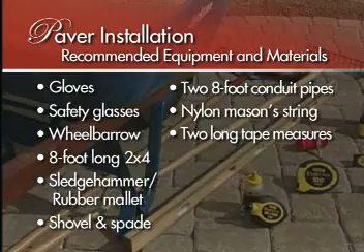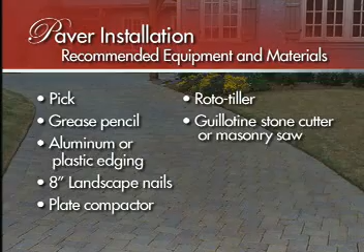string, 2 long tape measures, a broom, a carpenter's chalk line, a rake, a line level that you can clip to a string, a pick if your ground is hard, a grease pencil, aluminum or plastic edging, 8-inch landscape nails, a gas-powered plate compactor, a rototiller, a guillotine stone cutter or masonry saw, and wooden or metal stakes.

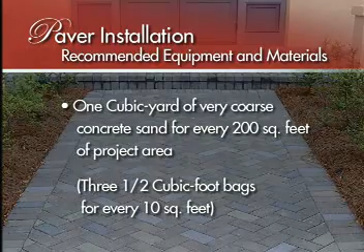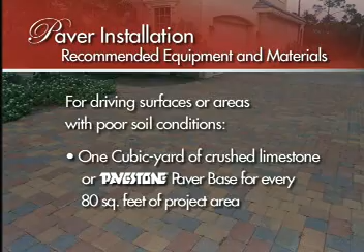A cubic yard of very coarse concrete sand for every 200 square feet of project area, or 3 half-cubic foot bags for every 10 square feet. If you're installing a surface that'll be driven over, such as a driveway, or you have poor soil conditions, you will need 1 cubic yard of crushed limestone or Pavestone paver base for every 80 square feet of project area. If you're installing a patio, pedestrian walkway, or any surface that won't be driven over, you will need 1 94-pound bag of Portland cement for each 30 square feet of the project area.

There are basically 8 steps to install paving stones. 1. Site preparation. 2. Excavating. 3. Installing the base. 4. Screeding the sand bed. 5. Laying the paving stones. 6. Cutting the paving stones. 7. Installing the edge restraints. And 8. Compacting and finishing.

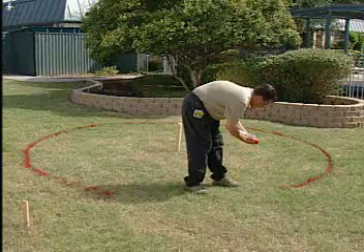This project is a freestanding circular patio. To begin building this project, you'll want to take a can of spray paint and draw to the best of your ability the perimeter of the project on the ground. We want to lay out the patio design and determine the finished height. Determine in what direction you want the pavers to lay in the finished project and run a string line across the middle of the project in that direction.

Then place another string line at a 90-degree angle, again passing through the larger part of the project, forming a cross. From the intersection of the 2 string lines, make a mark 3 feet out from the intersection on the width line. On the length line, make a mark 4 feet from the intersection. Now, measure the distance diagonally from the 3 and 4 foot marks. For the angle at the corner to be 90 degrees, the diagonal must be exactly 5 feet long. If not, adjust the angle of the width line until the diagonal is 5 feet.

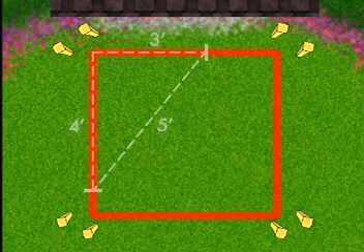If your project is a rectangular patio, begin by spray painting a rectangle on the ground to approximate the project's finished dimensions. Place stakes in each of the 4 corners. For accurate stone laying, it's very important that the sides of the rectangle are parallel and that each corner is a 90-degree right angle. You can make accurate 90-degree angles using the 3-4-5 triangle method as we just described. However, you want to measure the angle from a corner of the project, staking the string line out in 2 directions. For more detail on rectangular patios, see the installation information on the Pavestone CD. Now, let's get back to our circular patio.

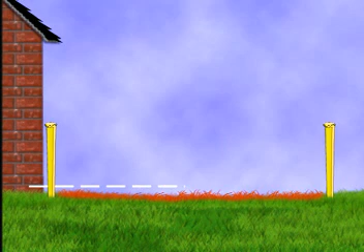With the project area staked and marked, the next step is to establish the height of the paving stones. The height should be slightly above the surrounding ground and sloped so rainwater will drain away from the house. To establish an adequate slope, use the line level. Start at a stake and begin by tying a string at the level you want the paving stone height to be. Set the level of the string by using the line level on the string line. Adjust the string on the outer stake

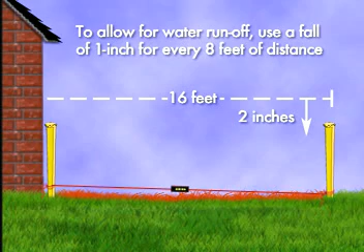until it is level. Now, to establish a slope, simply calculate a fall of 1 inch for every 8 feet. A patio that runs 16 feet out from the side of the house will have a slope of 2 inches. So just lower the string level on the outer stake 2 inches. Repeat with the other string line going away from the house.

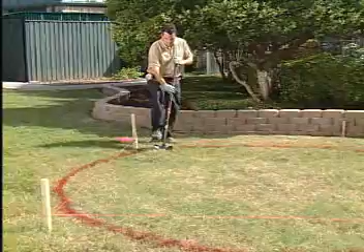With the project area marked out, you are now ready to excavate. Dig out the project area to the proper depth plus another 6 inches past the string lines. For a patio, dig out a depth of 3.5 inches down from the height of the string lines.

If the surface you are excavating is grass, use a spade or a sod cutter to remove the sod, but don't throw it away because you'll want to use it to re-sod the edge around the paving stones when the job is complete. So just roll it up and store it in a cool, damp place to keep it moist.

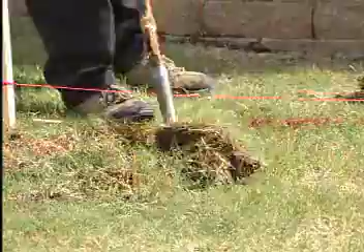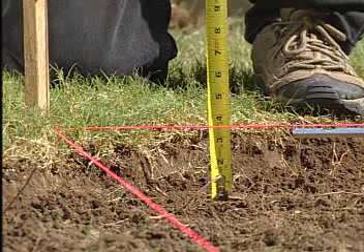Use a shovel to remove the rest of the soil once the sod is removed. You may have to use a pick to loosen the dirt if the ground is hard. Check your depth regularly using a measuring tape against the string lines and additional cross lines. You want to dig out a rough depth that comes to within 1 inch of the final depth.

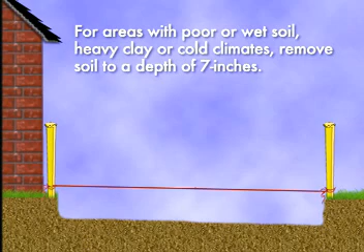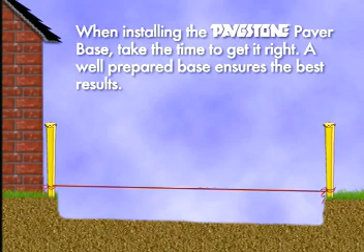For areas with poor or wet soil conditions, heavy clay, or extremely cold climates, remove the native soil to a depth of 7 inches. Now you're ready to install the Pavestone paver base. Be sure to take your time to get it right. A well-prepared base is the secret to a beautiful and long-lasting patio. Please do not skip this step and lay pavers over native soil.

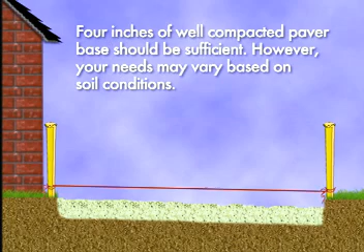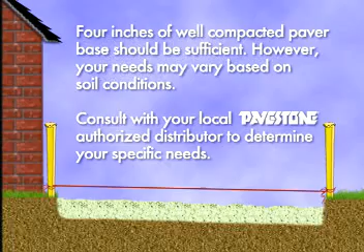Generally, 4 inches of a well-compacted paver base should be all you need. However, keep in mind that soils vary from region to region. Consult with your local Pavestone authorized distributor to determine the best type of base material for where you live. We will use the cement stabilization method today, which involves tilling Portland cement into the existing soil.

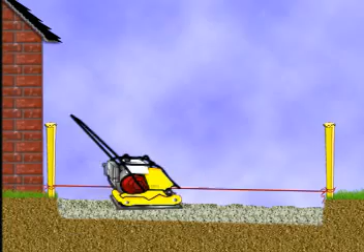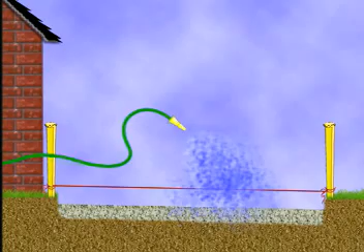After the soil and Portland cement are tilled together, use a vibrating plate compactor to tamp down the base. If the project area is small, you could use a hand tamp. However, we strongly recommend renting a plate compactor because you will also want to pack down the paving stones once they have been placed. When the base is compacted, lightly wet it so that it becomes rigid. Make sure that the compacting is complete.

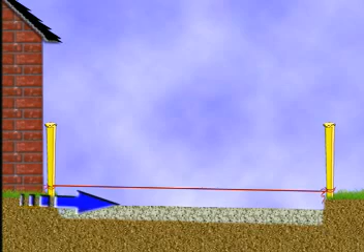The final step in preparing the base is to make absolutely sure that it is flat and that the slope is consistent. Your finished paving stone surface will conform to the base exactly, exposing every dip and rise, so it's important to get it level.

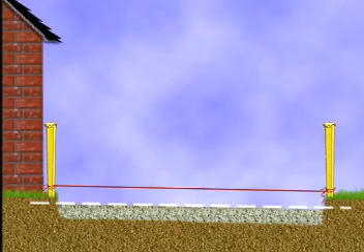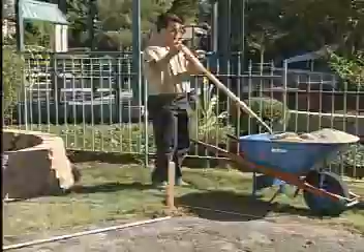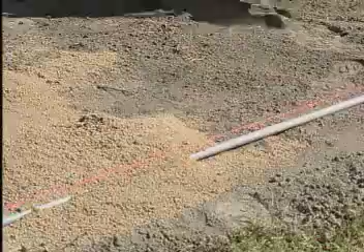Before you can set the paving stones, you must cover the base with an even layer of paver sand. Take two 1-inch or 3/4 inch steel conduit pipes and set them on the base about 6 feet apart, making sure that they are parallel to each other. Shovel some coarse paver sand between the pipes. Level out the sand by screeding it back and forth with an 8-foot 2x4 until it is smooth and flat.

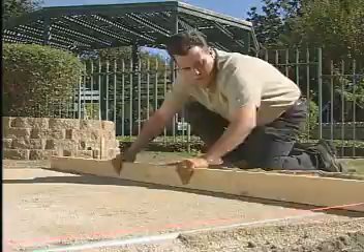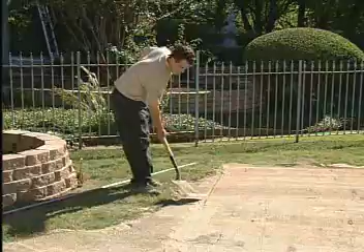Lift out the pipes and carefully fill in and screed the gaps. You will work the project area one square section at a time, first screeding the sand bed, and then laying the stones on it before moving on to the next section. Be careful not to walk on or make any impressions on the screeded sand as you work.

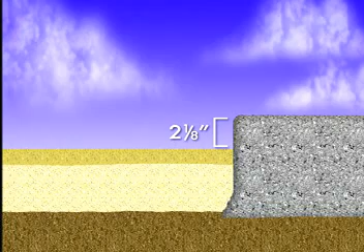Before we move on, a couple of things. If you are laying paving stones next to an existing concrete surface, you should lay the sand so that it is exactly 2 1/8 inches below that concrete surface. A good way to do this is to cut a 2 1/8 inch notch out of your 2x4 so that when you screed next to the concrete surface, the 2x4 will screed the sand 2 1/8 inches from the top of the concrete.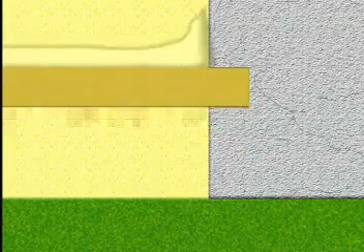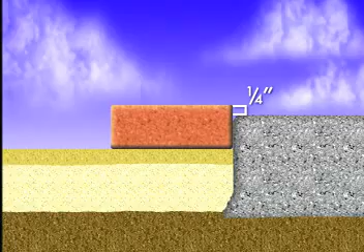You can check the sand height as you go by setting a paving stone next to the concrete. It should stand 1/4 of an inch above the concrete surface, because when it is compacted, the paving stone will drop exactly 1/4 inch on the 1-inch bed of coarse sand you just screeded.

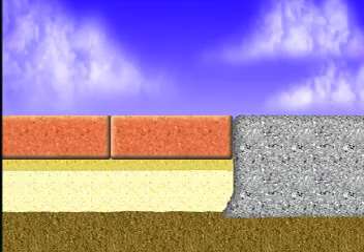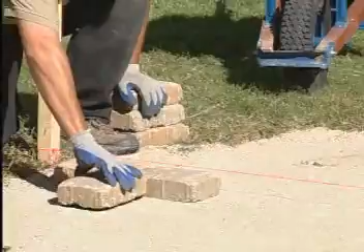For a square or rectangular project, start laying your paving stones in the sand, first starting in your square corner and working your way outward into the project area in a triangular direction. Make sure to lay your border stones first. Since our rounded project is freestanding and not up against your house or a sidewalk, we will lay out in a triangular direction from a starting point at one edge of our project.

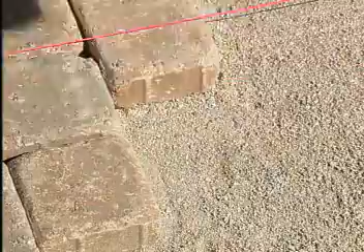Lay your stones one by one, sliding each new paving stone straight down onto the sand against the paving stone you have just laid. Be careful not to slide the paving stones across the sand into place, or you will ruin the smooth bed you just created, and they will not fit snug to one another. To nudge the paving stones tighter together, gently tap them with the handle of a hammer or with a rubber mallet. Never stomp a paver into place.

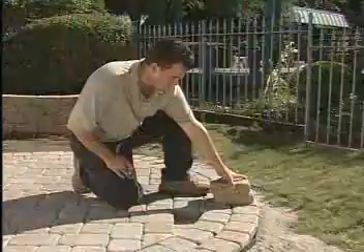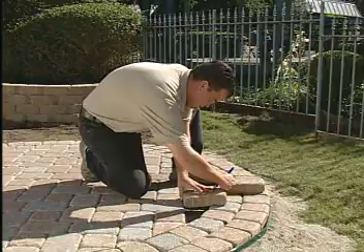Continue to lay pavers outward, filling in a triangular direction from your starting point. If, after laying some stones, you find that they are not aligning correctly, stop and find out what the problem is before continuing. Once you get all the paving stones in place, you may find that some may need to be cut to form a straight line or curve. To determine where to cut the stone, set the full stone in place, and then use a grease pencil and straight edge to mark the cutting line on top of the paving stone. Carefully remove the stone once it's marked.

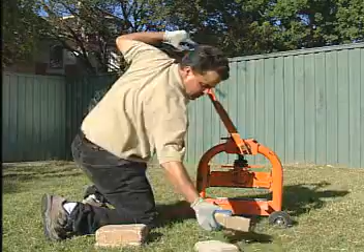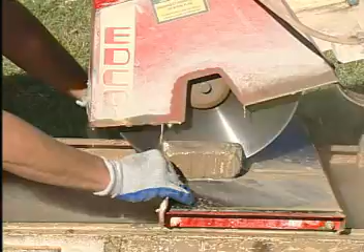You can use a guillotine cutter for simple straight cuts, but for angles and overall better results, we recommend a masonry saw with a diamond-tipped blade. A masonry saw is easy to use and makes smooth and accurate cuts. No matter which cutter you use, always wear gloves and safety goggles.

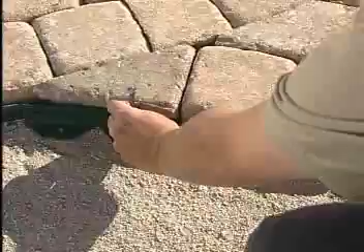Once your paving stones are set, it's time to install an edge restraint to keep them in place. The two most common types of edge restraints are aluminum edging and plastic edging. For pedestrian traffic, we highly recommend that you use aluminum edging. Aluminum restraints are lightweight, easy to use, flexible, and they do not warp over time. Use landscape nails to nail down the aluminum edging along all the exposed sides of your paving stone project.

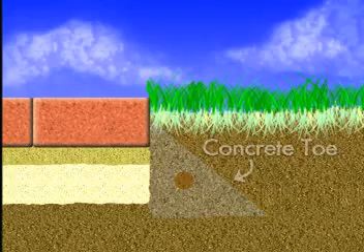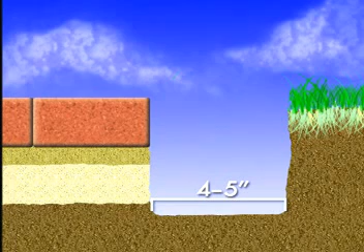For driveways, it's recommended to install a concrete toe with 3/4-inch rebar on all exposed sides. After all the paving stones are cut and set in place, use a flat shovel to dig a trench around the edge of your newly laid stones. Dig straight down 2 to 4 inches below the bottom of the paving stones and out from the edge of the stones 4 to 5 inches. Be careful not to move or in any way disturb the paving stones.

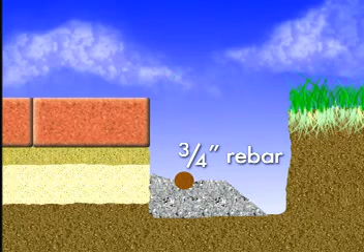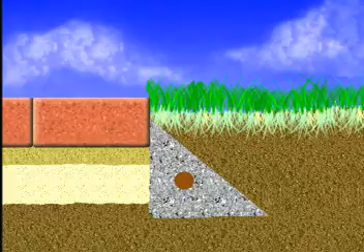Next, shovel a thick mixture of concrete into the trench and smooth halfway up the paving stones at a 45-degree angle as shown. That's all there is to it. Your paving stones are set. It's time to finish the job by setting the paving stones firmly into place with the vibrating plate compactor. This is the most critical step to locking your stones in place.

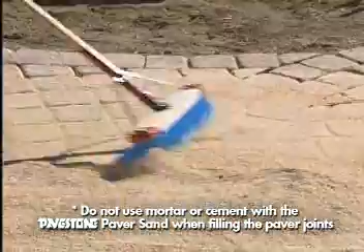Spread a light layer of Pavestone paver sand over the surface of your project. Then, just as if you are mowing a lawn, make one pass over the entire project area. Use a rubber mallet and a wood block to set the areas you can't reach with the compactor. Next, sweep paver sand into the gaps between the paving stones and run the compactor over them one last time, sweeping more paver sand into any joints as needed. Be sure to keep extra sand from your project. After a few rainstorms, the sand in the joints will pack down and you may need to refill the gaps.

Congratulations! You just completed a valuable landscape improvement to your home. Now you can step back and enjoy your accomplishment with the personal satisfaction of having created a beautiful outdoor environment that is uniquely yours, easy to maintain, and one that you, your family, and friends will enjoy for years to come.